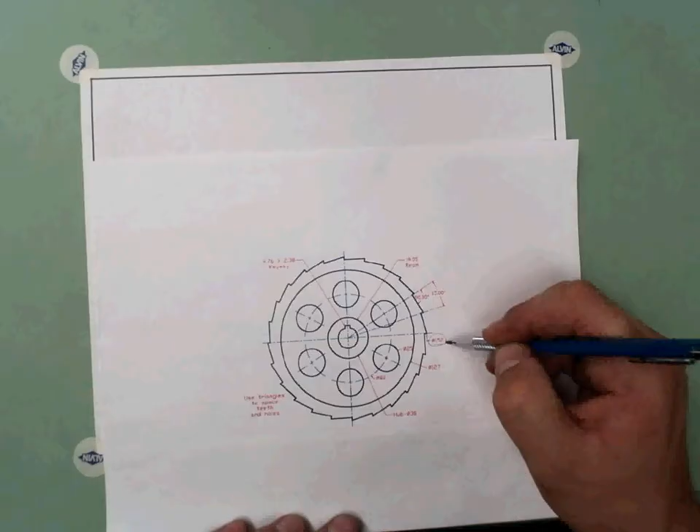Here we are, blowing it up just like we do all the other ones. We're going to use the triangles to space our teeth and the holes, which means all the tips and the actual tooth or the flat spot. Real quick, just so we know, the outside of this tooth is at 152, and this is millimeters. Keep this in mind because we got really large numbers. So 152 millimeters. I'm 15 degrees apart at each tooth, and they got to be 90 degrees.

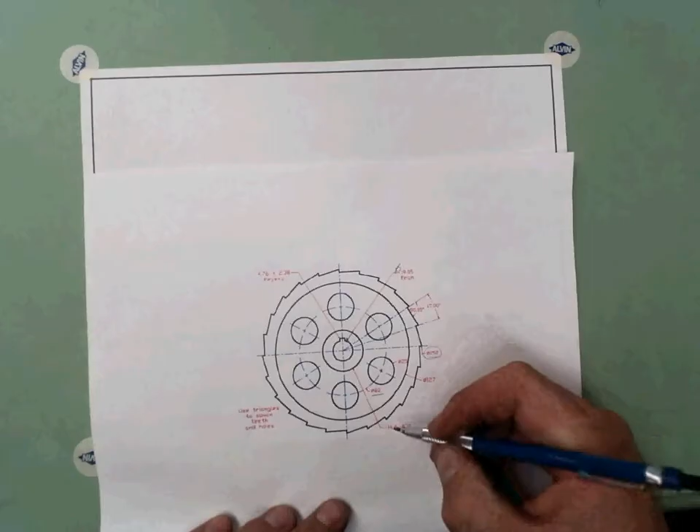My inside circle is 127 diameter. The small circles are a 25 diameter, and this radius here is going to be a 92 diameter. This ream, which means that reamed out hole right there, has a diameter of 19.05, and then the hub is a diameter of 38, and then the keyway, which we'll go over. So right away I'm just going to start by drawing a bunch of arcs and get started with something and then work from there.

So remember, I'm dealing with my metric scale, right? So flip this around. I'm going to first do the 152. So half of 152, of course, is 76. There's 76. This is the outside of all the teeth. So real quick, very light, right? Nothing crazy. And then half of the 127. So that's going to be 63 and a half.

Wow. It's a late night. Sorry, guys.

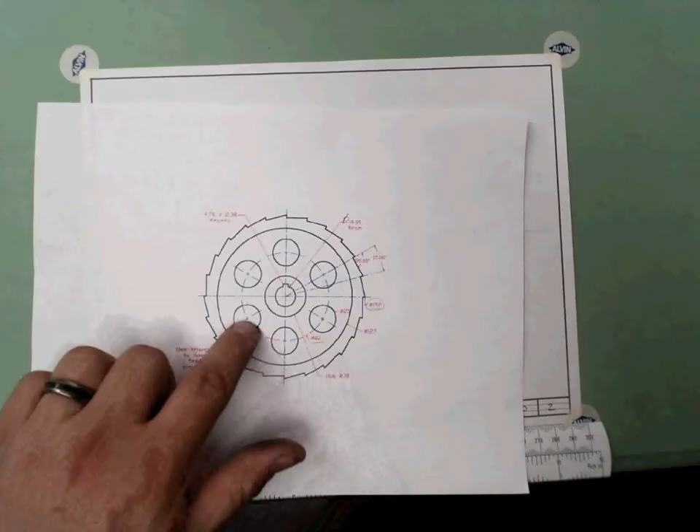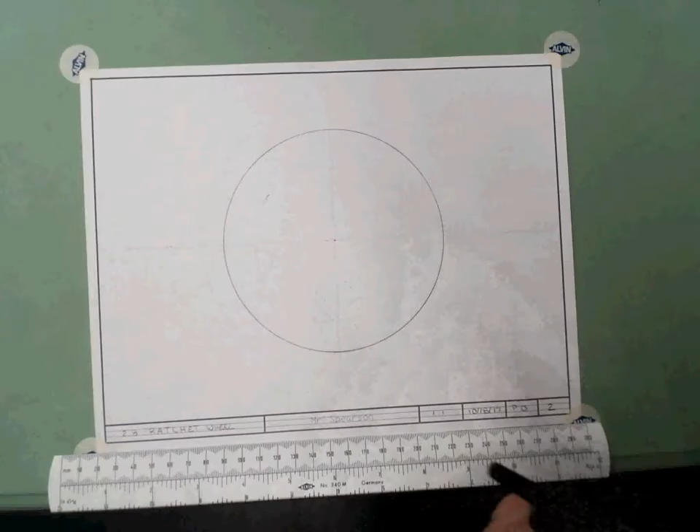Okay. Now this one I'm going to darken because nothing happens to this line. Now this circle here with all the other circles around it is at a 92 diameter. So of course we're going to do half of 92. Now this one here has got to be light because it's not darkened at all. So there it is. Now real quick, I'm going to do the diameter of the big one, which is going to be 38. So I'm going to set this to 19.

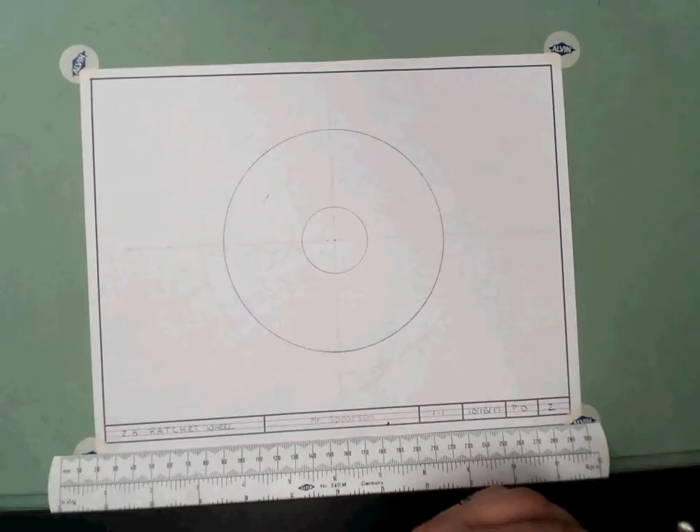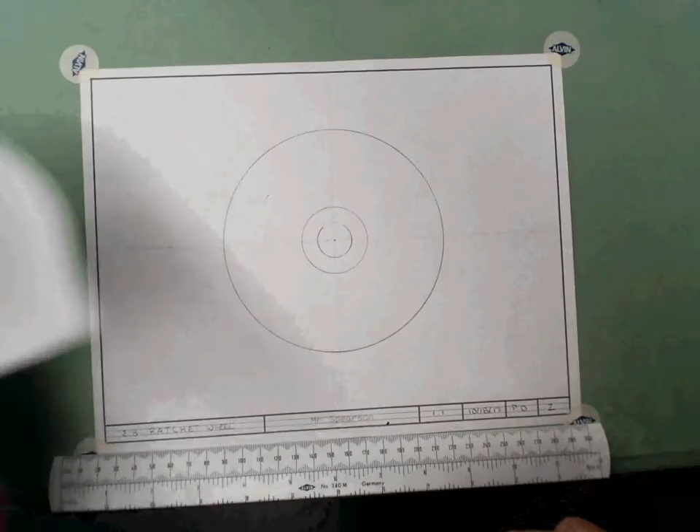And I'm going to get the smaller compass now to make it easier on myself. Now this one can be dark because nothing happens to this one. And then half of the 19.05 is going to be 9.525. So there is no possible way to get this thing so close, so we're just going to get it semi-close. And I'm going to be very light over the top, but then I'm going to get dark right here because I know that doesn't move on me. I'm going to stop there. I'm not going to get any darker until I know. So I got this, I got that, I got this, I got that.

Okay, now I might as well use my template to draw these 25s because there's no point in me trying to set that compass every single time. The other part though is we're going to get to the actual teeth. This one, you're going to blow by it. But we're going to do this keyway too real quick just so we can get it out of the way. So that's the top of the keyway, right?

The keyway has a width of 4.76. So half of, let's just go half of 4 is 2. So 1, 2, and then half of 3/4 is 3/8 roughly. So boom, boom. There's 1, there's 2. So then if I measure this, should be close to almost 5, just barely under. So there's that.

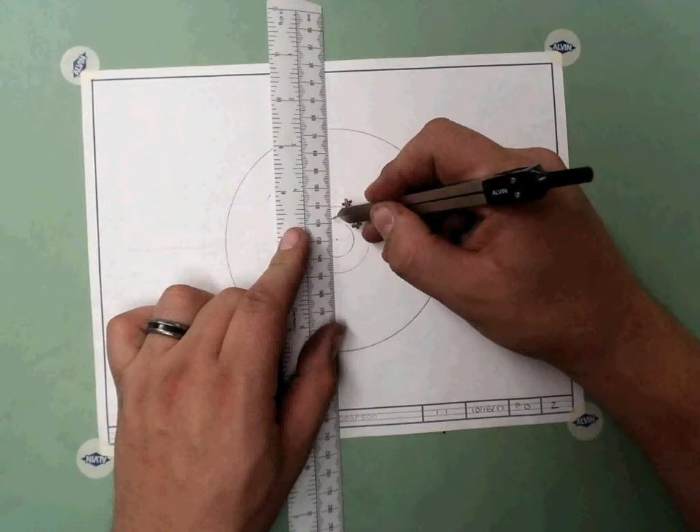Now real quick, I'm going to draw these as very light guidelines, right? Because this is just a keyway. We don't know what the height is. But I do know my height is going to be 2.3. So I'm simply going to come over here and go 2.3, 1, 2, 2.3. And now I'm going to darken it because now I know. Okay, come over here. This keyway is done. Come back here with the compass. Again, of course, now I know where I'm starting and stopping.

Bingo bango. Someone's at the door. Hang on 1 minute.

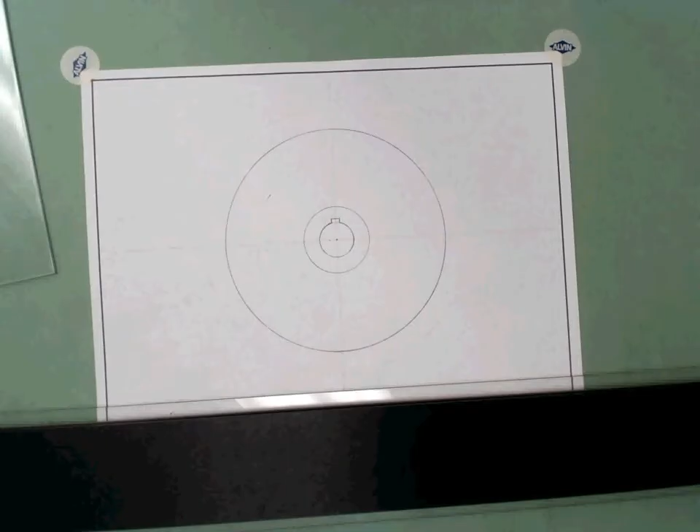Okay, no one was at the door.

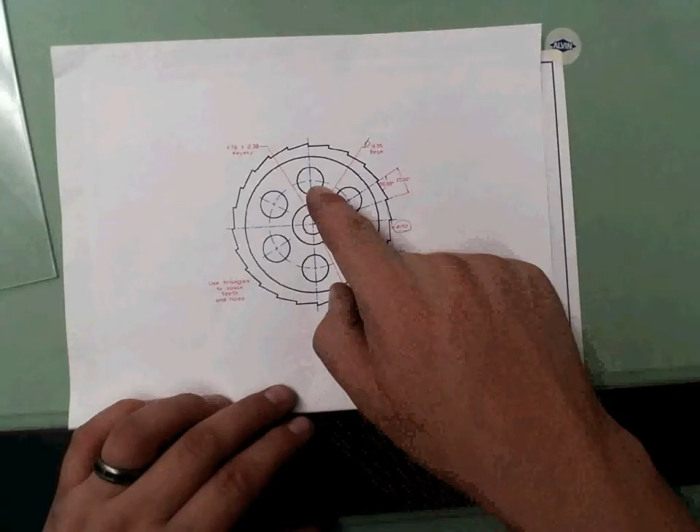All right, so we're going to draw these circles first before we get out to the teeth, because the teeth will be real quick. So notice these things don't have a degree on them, but we can all tell that they're equally spaced. So I'm just going to count them up. 1, 2, 3, 4, 5, 6. And we all know 360 divided by 6 is 60 degrees.

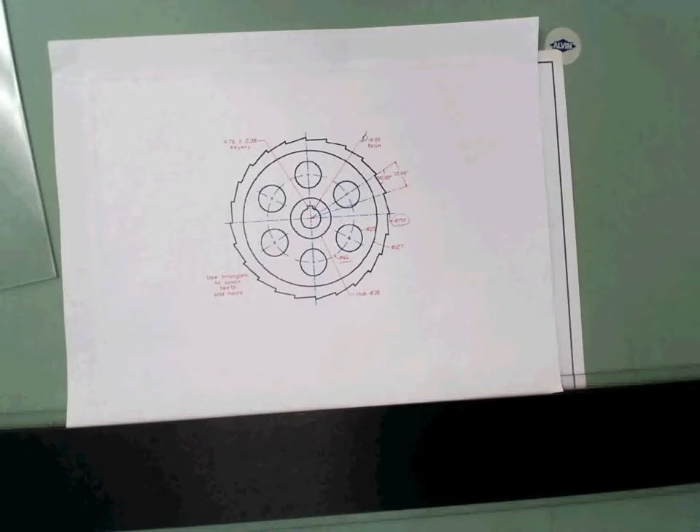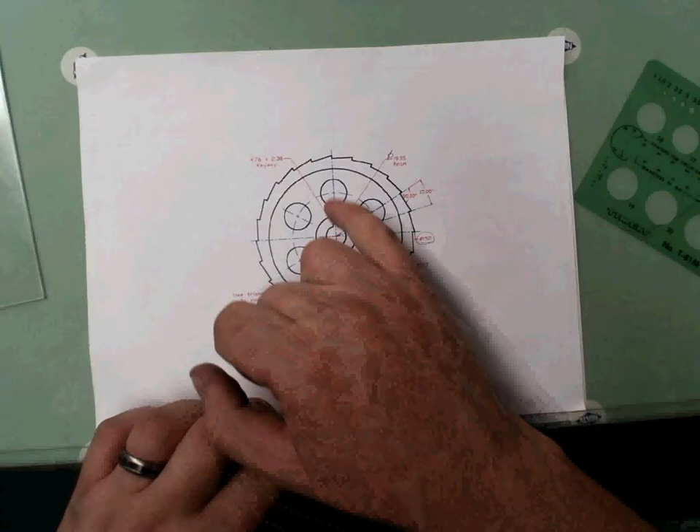Alright, guys, so real quick, I'm going to grab my template here. And my template is made up of 25, and look here, 25 is the biggest one. Notice I got these little dots out here. I'll use those to my benefit. So, 60-degree increments. You're 90 degrees here, and then these are 60 degrees apart. So technically 90 minus 60 is 30. So these are 30 degrees, and those are at 90.

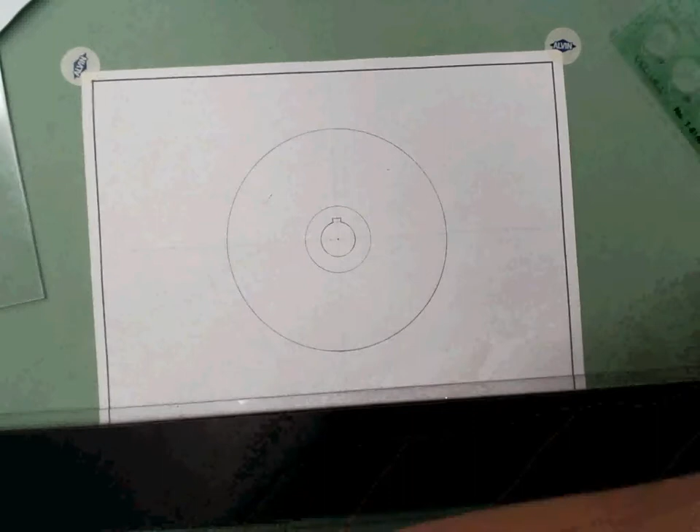So real quick, I have those ones. I'm going to swing over, and I'm going to do these ones. And I'm just drawing very light on this, because all I'm looking to find is the center, right? Because once I have the center, oh wait, actually I need more than the center if I'm going to be able to draw these right. I need a straight line so I can line up my holes on my template. So, here we go. I'm going to sharpen this too, because we don't want it to be dull and then have all these marks.

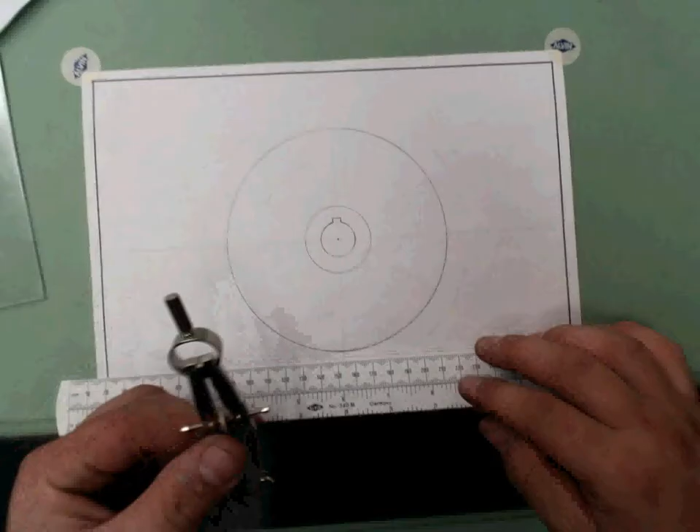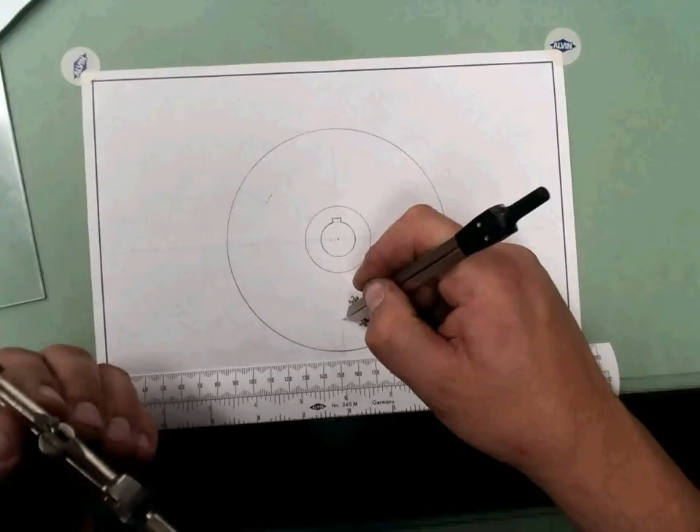So, here we go. There's 25. I'm going to simply just set it up here like so. Okay, maybe this template's not going to work very well. We're just going to have to draw it. Okay, so here we are. Set this to 25, right? Oh, wait, half of 25 is going to be 12.5, so I'm going to go 12.5 right there. Grab our divider and stab these centers. Not that one. Okay, and now I'm going to draw this. Now I'm going to go dark with it all. Keep going dark.

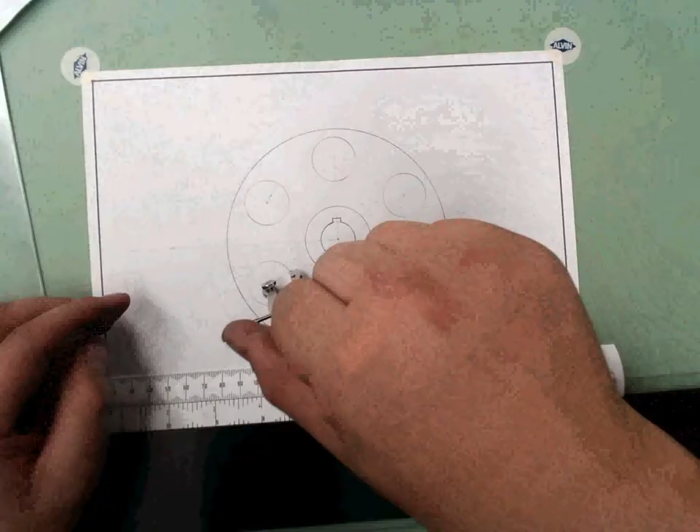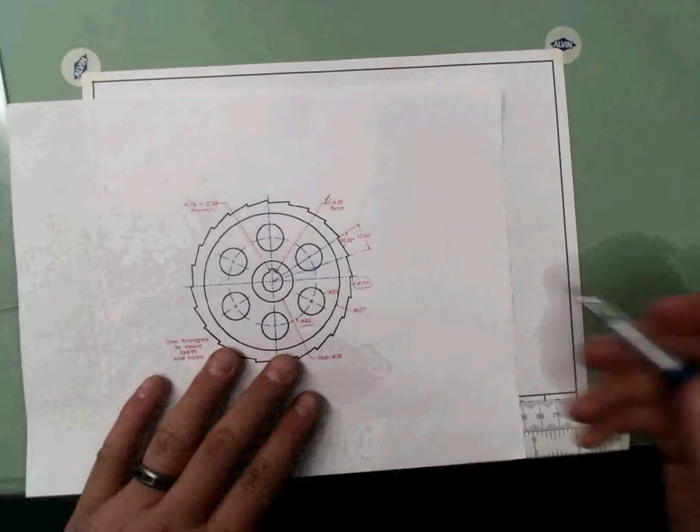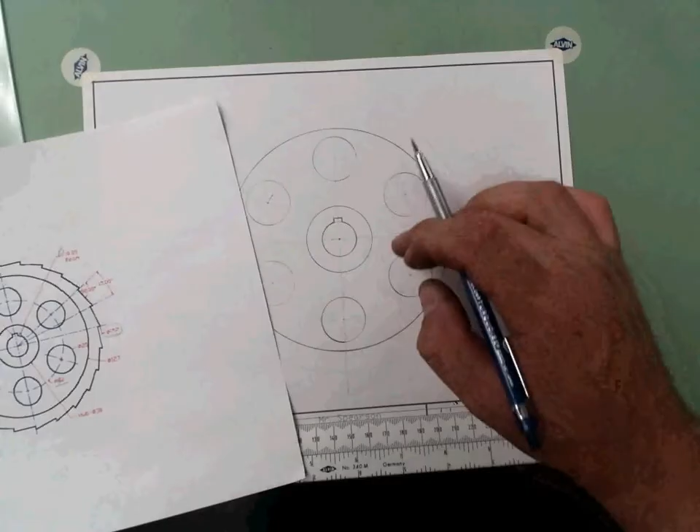Bingo bango. Alright, last but not least is my teeth, right? Because we've done the circles, now I just got to get to the teeth. Oh, and you know what's crazy? I'm looking at this. That says 82. Let me just double check here. Yeah, see how far away these are, and look how close these are. So I set this wrong. That's supposed to be a radius of 82, so these are all going to move in. I screwed that up, and I'm not going to redo it for the video purposes, but just make sure you turn it in with the right measurements in there.

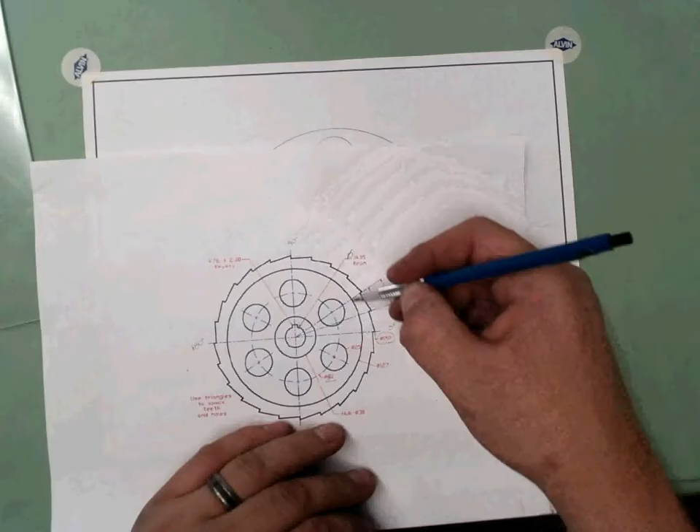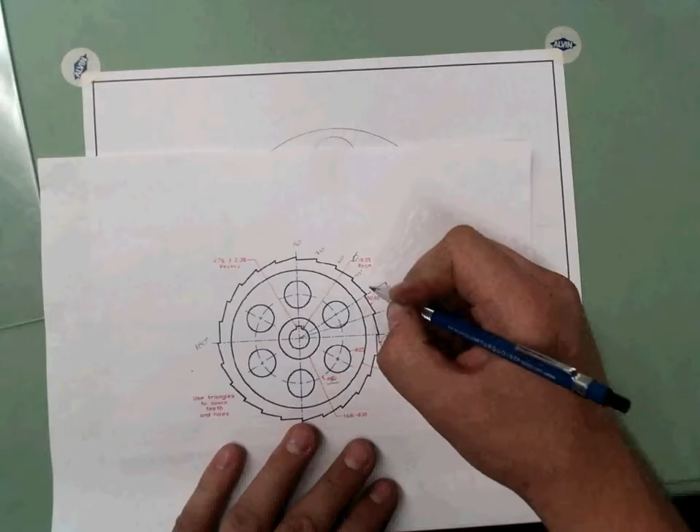Anywho, let's continue on. So here's the cool part. We know this straight line is 0, and we know this side is 180 degrees, right? Therefore, half of it must be 90. Now, the only section we're going to look at is this, because once we do this section, we can just flip our compasses to get this section, and then this projects down to here, and this projects down to there. So, the teeth are 15 degrees apart. If I know that's 90, minus 15, that's 75. That's to the point. Minus another 15 is 60, then 45, then 30, then 15, and then 0, right?

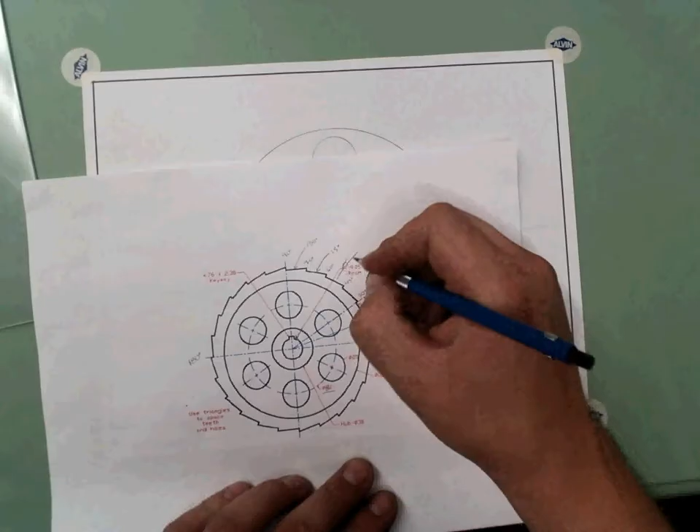Now, take a look here. See the straight line here? Straight lines are drawn at 180 degrees, are they not? These are at 15-degree increments, which means this one's going to drop down, and that one's going to be drawn at 15 degrees. Then this one's going to be at 30. Then this one's at 45. I'm just adding 15 to my previous number. There's 60, right? And then this one here, 75. And the last one, take a look. It's completely vertical, which means it's 90 degrees.

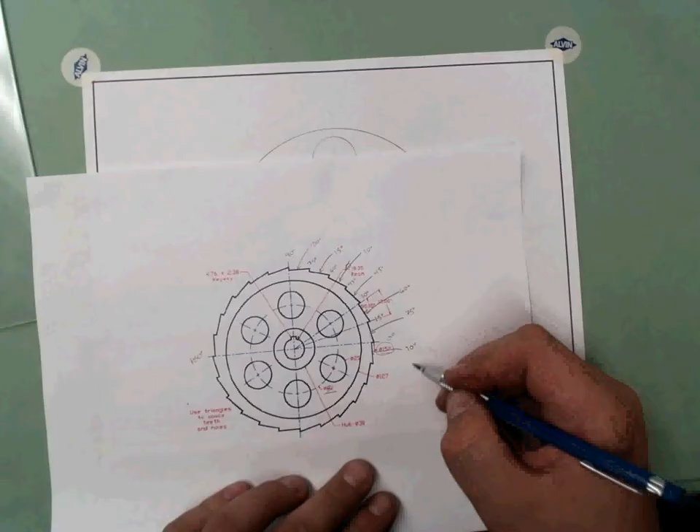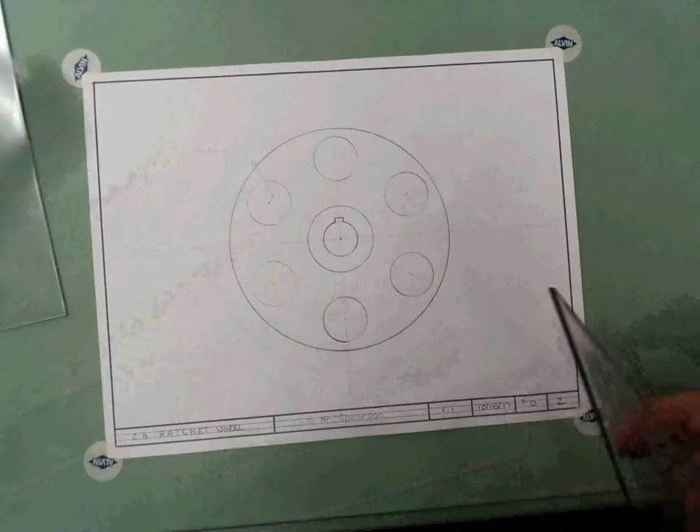And then it literally just starts back over. Then it's 75, then 60, then 45, then 30, then 15, then 0. Then it starts back up: 0, 15, 30, and so on, and it kind of cycles back and through. So, real quick, we're going to draw this, and then we're done with this video. I need to be 75 degrees for my first point, right? So, 30 plus 45 is 75, but I'm going the wrong way, correct? So, let's just flip-flop it.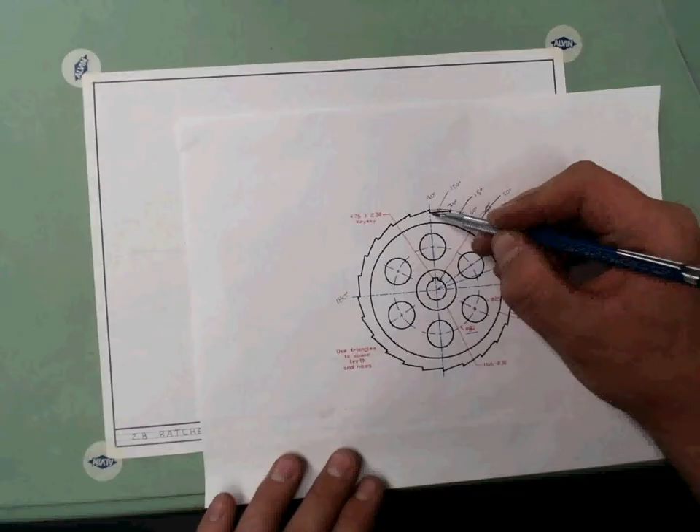There we go. All I want to be touching is the outside tooth, and I just want to show a line. Because once we have these lines set up, then we'll be ready to rock and roll. My next part, I have my tooth at 75 degrees. It's flat off that point, off that radius. See how this radius does this? So I'm going to go flat until it comes to a vertical line. I'm going to darken that because that's the bottom of every bloody tooth. Okay? So here we go.

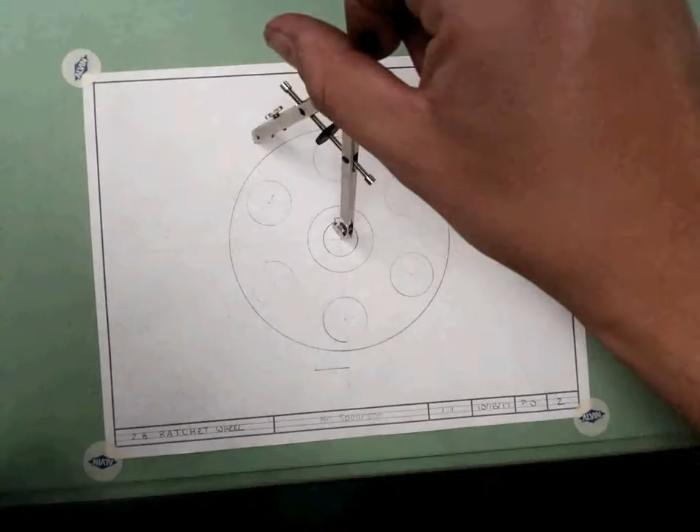There's the top of the tooth. Darken. There's the bottom of the tooth. Here's the top of the tooth. Here's the bottom part of the tooth. Now, real quick, just so when I start drawing all these other angles, I'm going to set this to the bottom of every tooth. And I'm going to draw it so light that I won't ever have to erase it again. And it looks like I didn't accomplish that, so I would have to go back and erase stuff. But there's the bottom of the tooth.

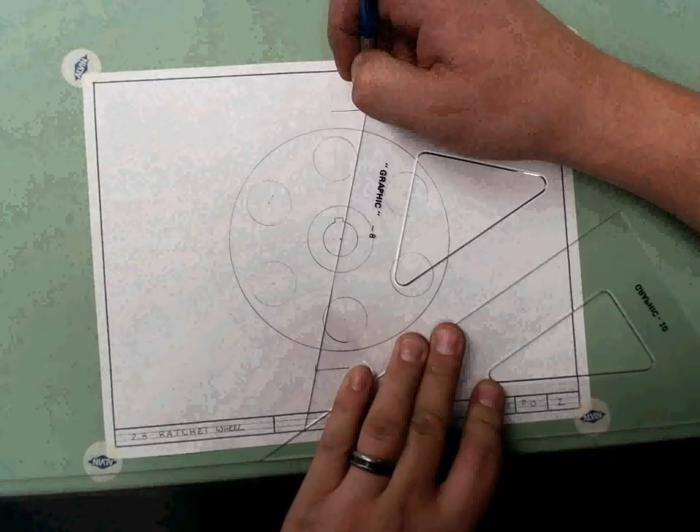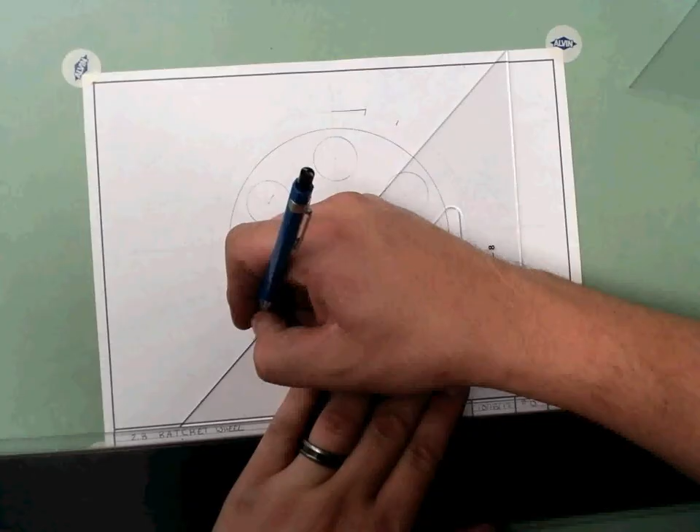Which means now that I have the bottom of every tooth and the top of every tooth, and I know the angles that I need to draw them at, I'm going to go back and draw this first one at 75 again. But now I know the bottom of the tooth, so I'm going to darken it. Then 75 minus 15 is 60. I'm going to draw that tooth. Then 60 minus 15 is 45. And 45 minus 15 is 30. Look at this, we're almost done.

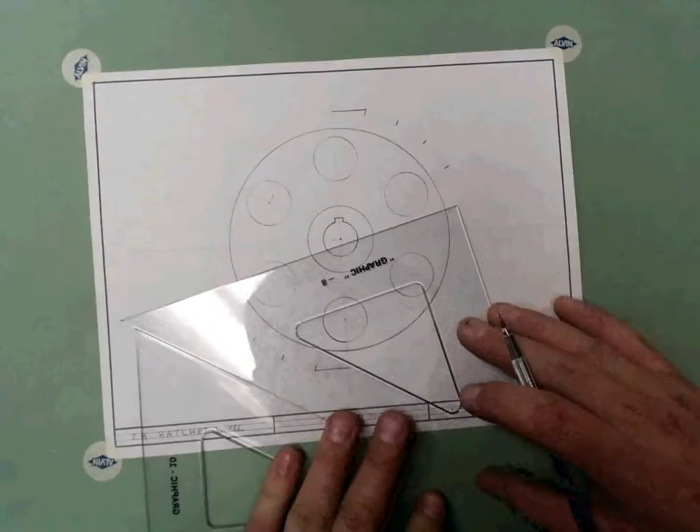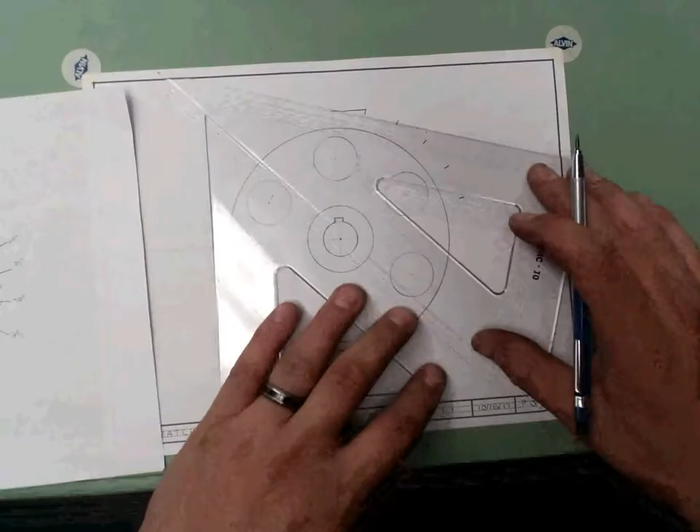Well, with this section, and I'm not going to do the other section because all you have to do is flip-flop it. But you get the idea. Last one. 15 degrees, right? Going the wrong way. I'm going to flip it. There it is. There's my 15 degrees. Now, while I'm here, I might as well draw this other 15 degrees because that's the bottom of the tooth. This one's drawn at 15 degrees with the slant going this way. See my slant? It's going the wrong way, so let's just flip-flop it. There's the top of the tooth. There's the bottom of the tooth. I already know where everything's at, so why not just darken it?

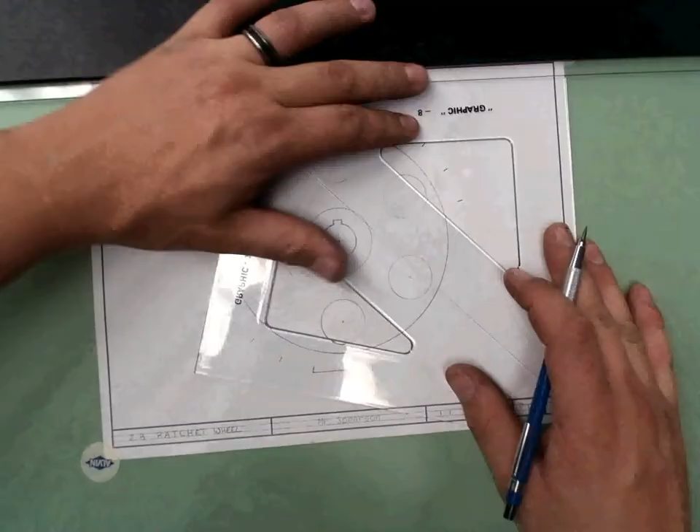Now, while I do that one, I might as well come over and do this one. Crap part is I can't get to that, so what do I have to do? Roll my stuff up, roll it back down, just like this, and flip-flop it again. And of course, I'm going to have more problems, but we're going to push it away here. There's the bottom of the tooth. There's the top of the tooth. Bingo, bango. Then we have 30. There's the top. There's the bottom. Might as well roll it down. I better do this one. Okay, then it's 45.

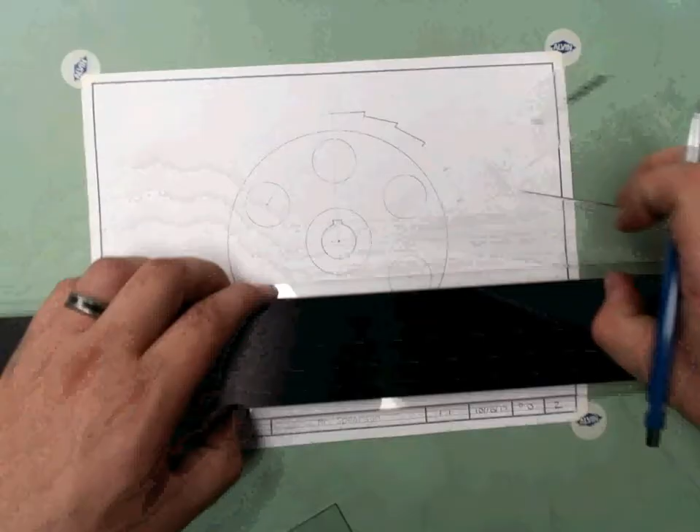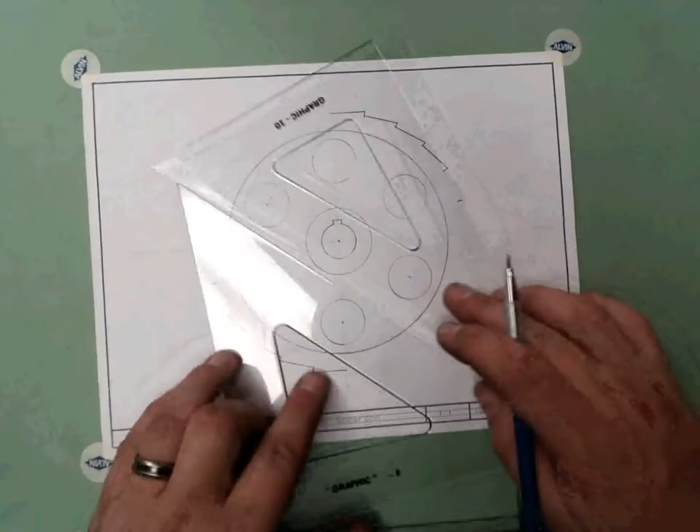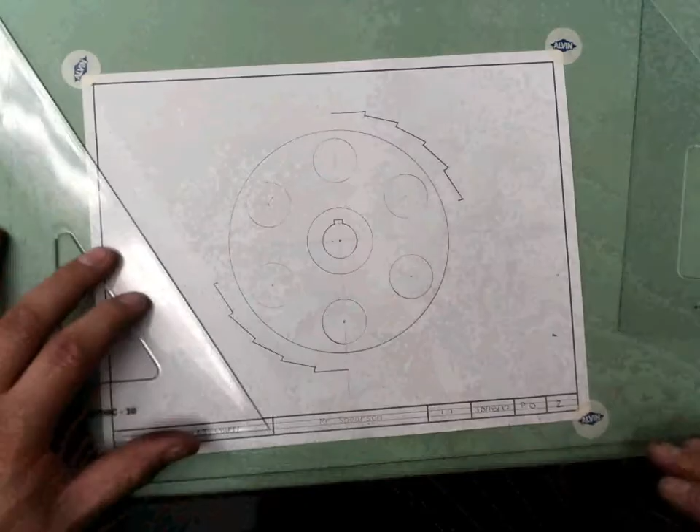Make 75. Look at this. We're almost done. See that tooth? Going the wrong way. So what do I have to do? Flip-flop it, right? Hang on. If that was drawn at 45... oh, 60. I don't know why I went to 75 all of a sudden. Here's 60. Bottom of the tooth, top of the tooth. And then the last one is 75.

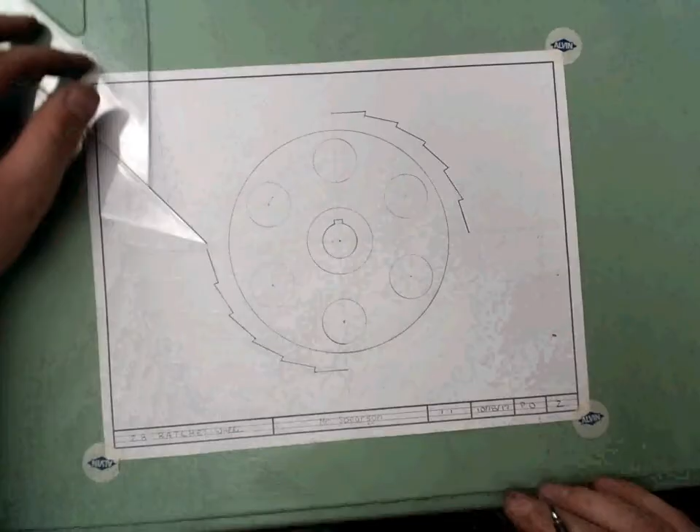Going the wrong way with it. There it is. There's the top of the tooth. There's the bottom of the tooth. Top of the tooth, bottom of the tooth. Bingo bango. Now I might as well draw these teeth. So I got them all done. I'm going this way, so what do I need to do? I just simply flip-flop it. It's pretty self-explanatory. I'm not going to spend the time drawing these. You guys will get it.

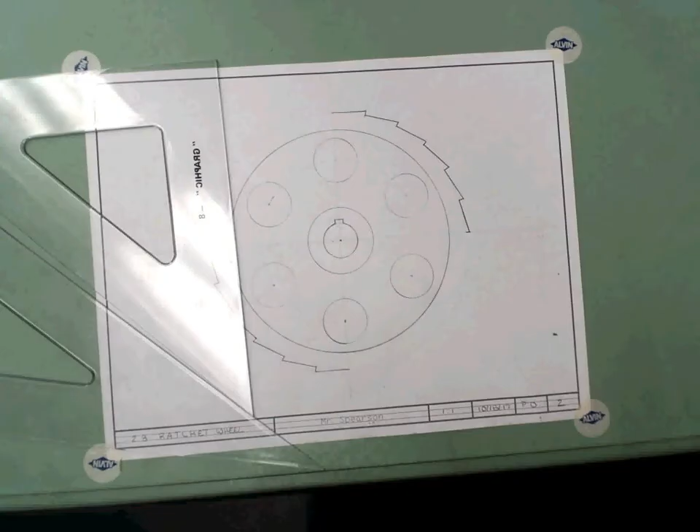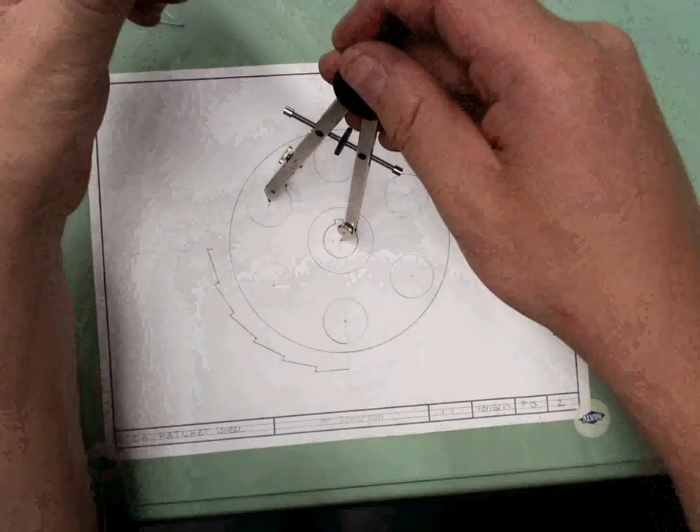Keep in mind, you've got to have your center lines everywhere it shows. So take a look at this. I better have center lines here, here, here, around here, and on all those. I'm not going to waste the time doing this for you, because you know what is expected. You don't freehand this stuff. You have to use your compass when you draw all this. It's such a pet peeve for me when you guys freehand this. If you keep doing it, I will start having you redraw this, and you will not like that. But you get the idea, right?

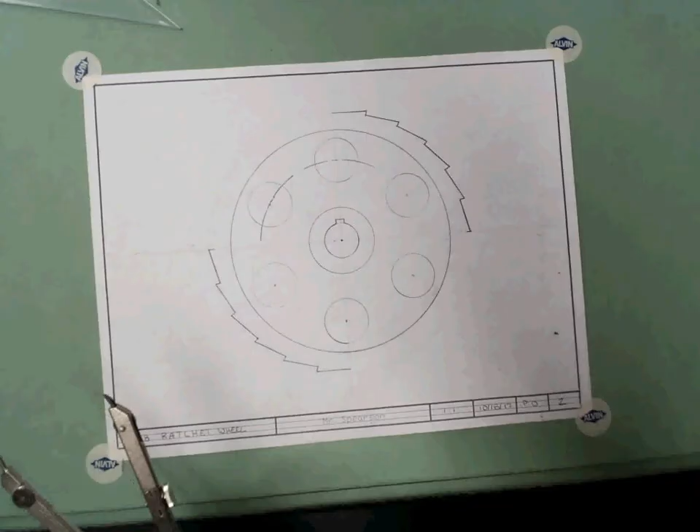Cool beans. All right. That is 2.8 Ratchet Wheel, and that's the end of Unit 2. Unit 3 is pretty easy. It's arcs and compasses, and we'll go over the portfolio and have some fun.